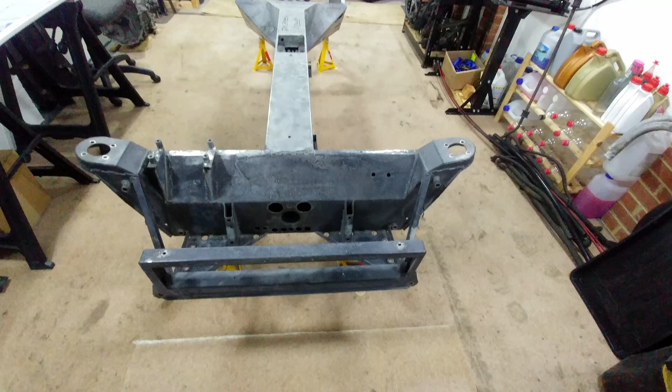Welcome to episode 3. In this video I want to go over the Esprit chassis before I start working on it. As you can see, it's been completely stripped down and cleaned up, so what better time to look at it than now. The chassis is what is commonly called a backbone structure. The body of the Esprit literally sits across the central spine like a saddle, hence the name backbone.

It is the last of its kind before Lotus invented the bonded aluminium chassis for the Elise in 1996. But it served Lotus very well, this being the final evolution from the Elan chassis that was introduced way back in the 1960s. It is an exceptional structure and extremely lightweight, coming in at only 72 kilograms.

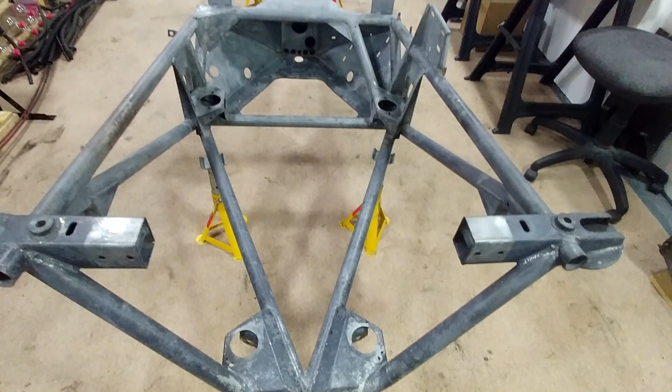Most of the construction material is folded sheet steel, commonly 16 gauge. The tubes are 1.5 inches in diameter and about 14 gauge in thickness. After welding the chassis at the factory, everything was then hot dip galvanised to protect it against corrosion, and as you can see, it has done exceedingly well.

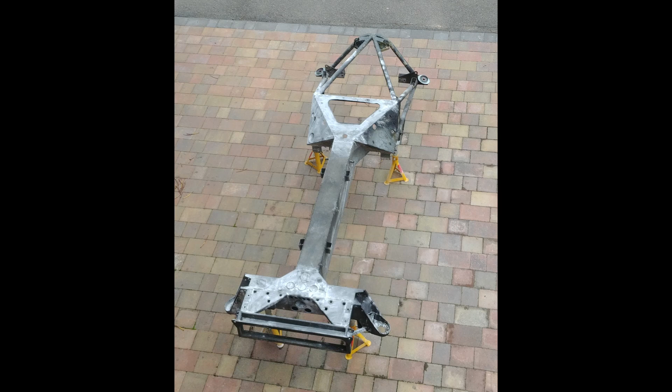When the chassis was stripped, the first thing I did was to get it cleaned and scrubbed. I had planned to use a dry ice blaster to remove the dirt, but in the end it was quicker to do it by hand. I did this using a pressure washer and a strong degreaser, and then good old fashioned elbow grease with a lot of help from my dad.

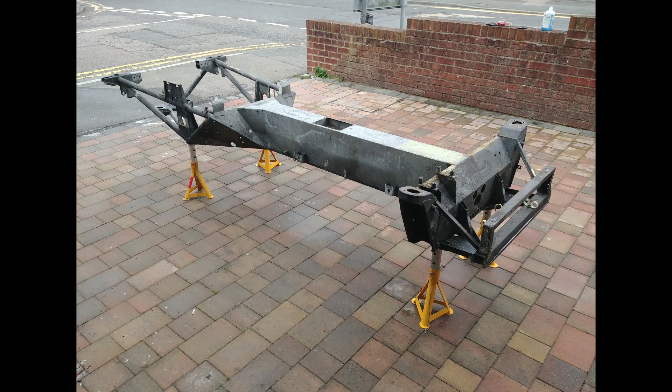What better way to enjoy a November day than to be outside in the freezing cold scrubbing an old piece of metal? Yes, we got a lot of funny looks, but also a lot of people were very interested in what we were doing as well. After washing, a mild nylon abrasive was used to remove the stubborn dirt, and what I can only suggest is zinc oxide from the decaying galvanisation.

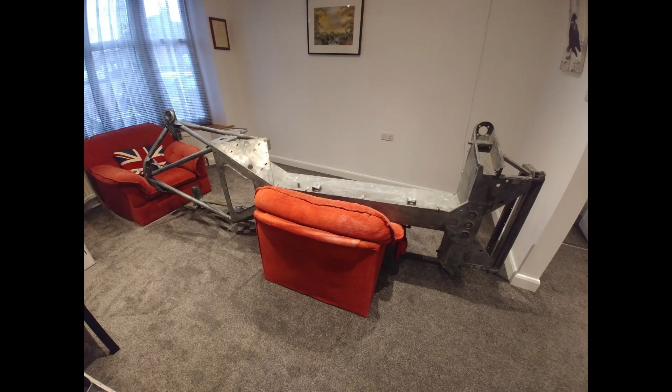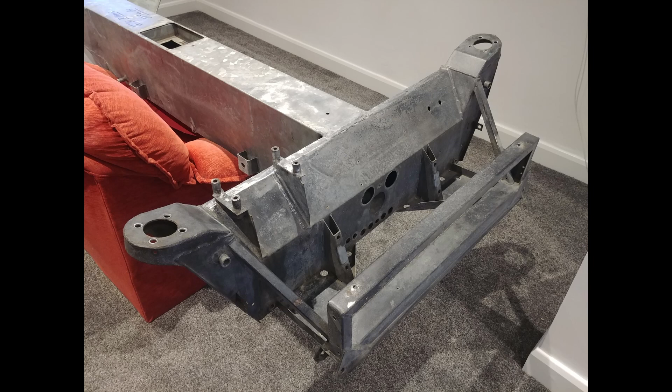After getting wet, I had to store it somewhere whilst it was drying, and I thought, well, what better place than my living room? So here it lived for about a month whilst I checked it over. The good news is the chassis is perfectly straight and well within Lotus's tolerances. Amazing for a car that is over 30 years old and has over 100,000 miles under its belt. Hats off to the Lotus engineers, yet again they did a superb job.

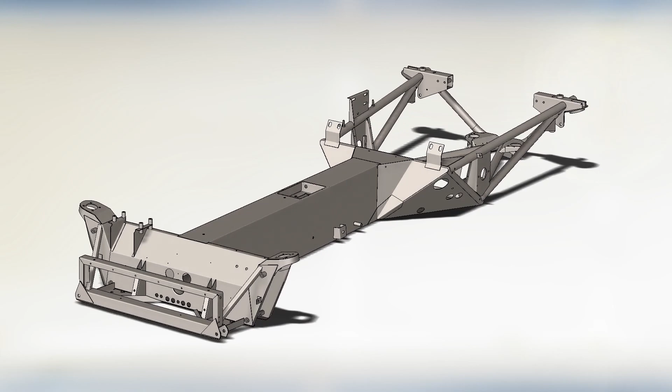Being a structures guy, whilst indoors I studied the chassis and drew the whole thing up in CAD using 3D scans, digital measuring and good old fashioned wire triangulation methods. Here is the result. This is really going to help me in designing the other components of the project, including the new cooling system, the safety cage and the modifications to the braking and suspension when they are added. It also means I can run simulated stress analysis on the structure, more on that in later episodes.

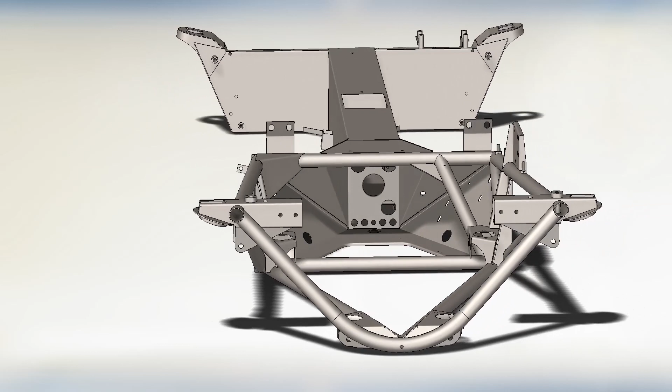Each panel is individually modelled and can be removed. This makes the CAD model an ideal way to explore the construction and gain an insight into what was one of the best chassis of its era, responsible for the Esprit's legendary handling characteristics and developed by a company that dominated Formula 1 for many years.

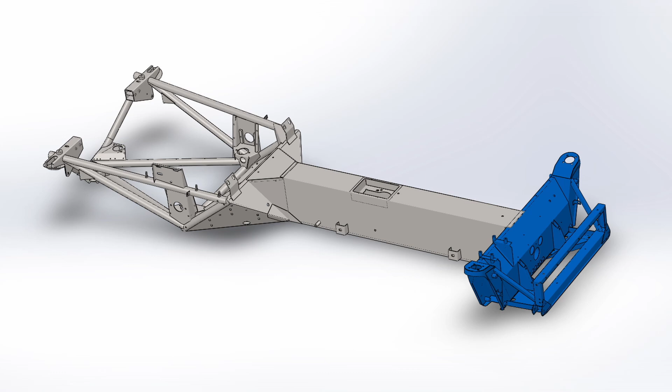The chassis is split up into 3 areas: the front crossmember, front suspension and supporting structure; the backbone, also known as the tunnel or the spine, and its interface panels; and the tubular steel section at the rear, which contains the engine bay and manages the rear suspension.

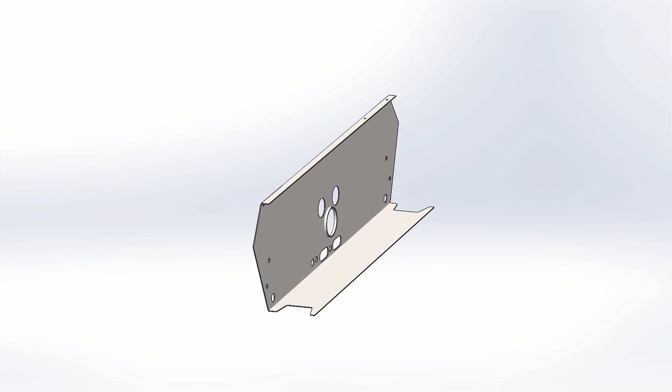The main front crossmember box section is made up of 2 folded pieces of 16 gauge steel capped by thicker suspension uprights. The upper suspension damping mounts are welded into place and steel tubes locate the upper and lower wishbones on both sides.

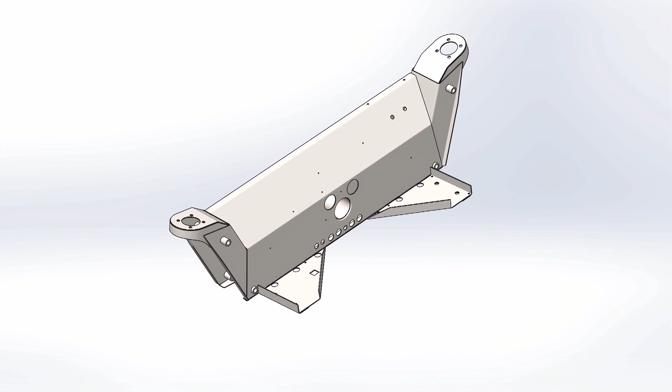2 forward support plates are welded into place and site the lower wishbone crossmember, which is triangulated back to the main crossbeam by these square tubular sections. In later models of the chassis, these are bolt-on removable items.

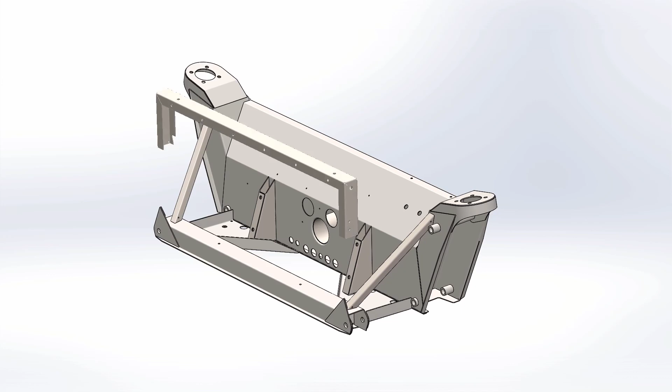The steering rack mounts, in true Lotus fashion, act not only to support the rack but to further reinforce the front section. The front frame provides anchoring points for the radiator housing and also the front of the body shell. And finally, the pedal box mounts are situated in place.

The backbone is primarily made up of a large single piece of folded sheet steel. It is formed into a large U section and it has a cutout in the top to allow the gear lever mechanism to be fitted.

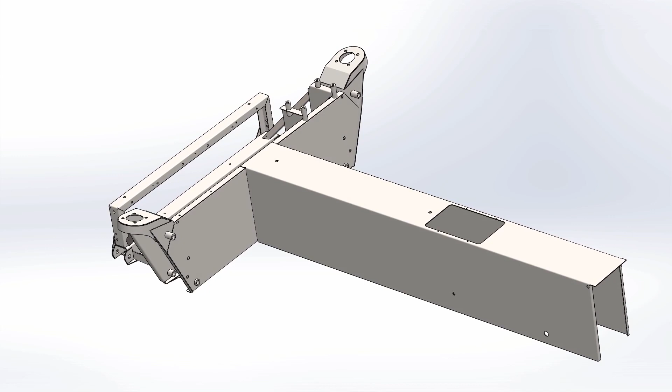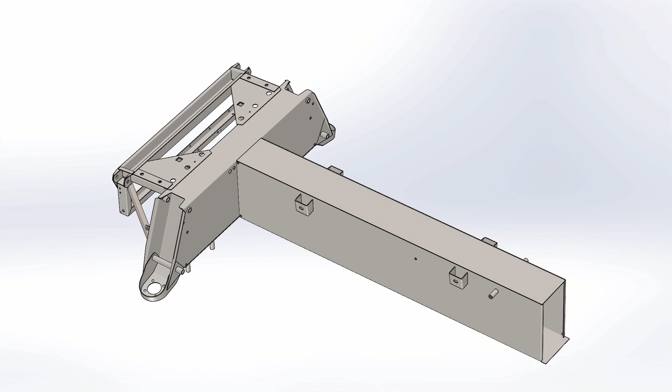Inside the tunnel, the gear lever mechanism plate is welded into place, along with the seatbelt anchor point and 4 body mountings. The open section underneath is capped off by the second piece of folded sheet steel as shown. Finally, at the front, a reinforcing plate is welded at the joint to the front main cross member for added strength.

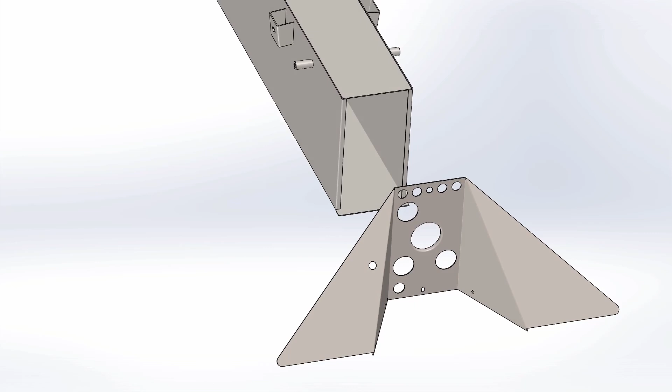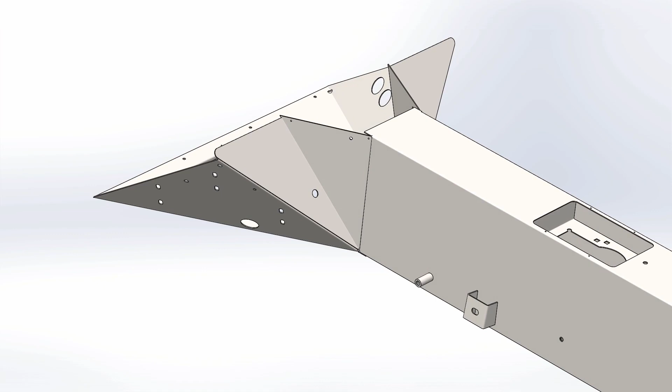At the rear, a complex folded sheet steel arrangement joins the backbone to the tubular steel section. It is completed by this second larger part welded into place. To further strengthen this section, two complex folded reinforcing plates are added on either side. Finally, this section is capped at the top with this plate, and two chassis to firewall mounts are added.

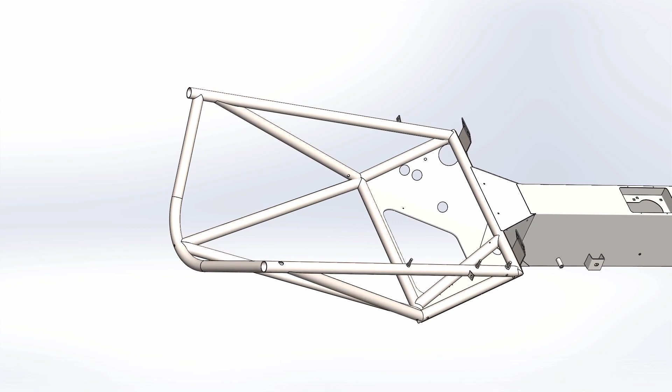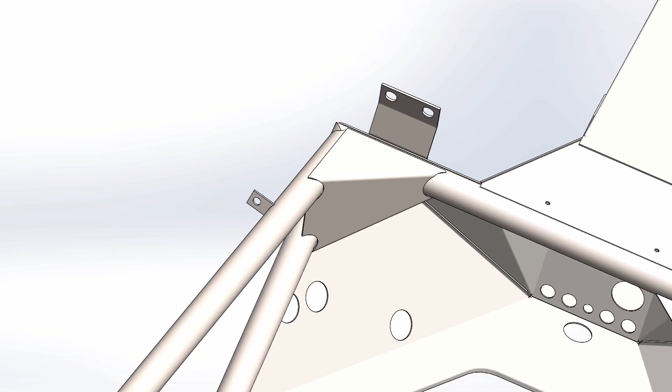The rear structure is dominated by a welded tubular construction. It has a distinctive hoop at the rear to allow the transmission to extend out of the back slightly. The bracing at the front of the bay is asymmetric to allow the engine with its offset cylinder head to fit in. The left-hand side corner is reinforced with this section. The two rear suspension trailing arms are attached to the chassis by these plates, which serve to further strengthen the tubular section.

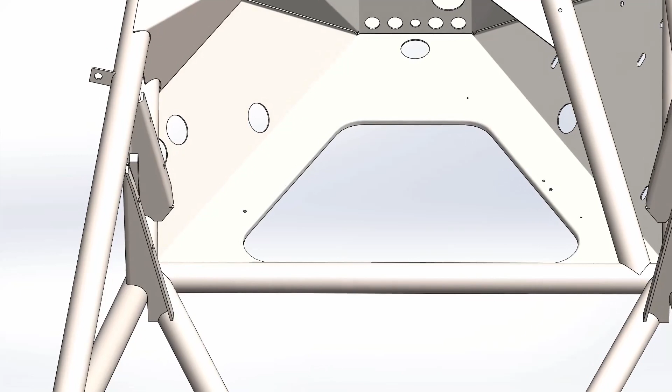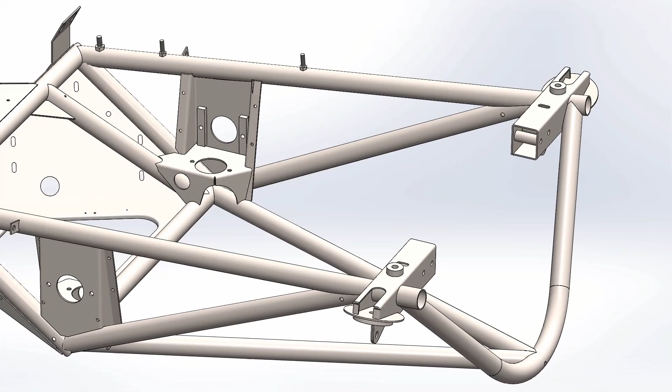At the point where everything meets, there are two engine mounting platforms, one on the left and one on the right. The rear suspension damper mounts also serve to situate the rear suspension upper control arm, the body mounts, and the location for the removable rear cross member. The rear suspension upper control arm is further supported by these two brackets.

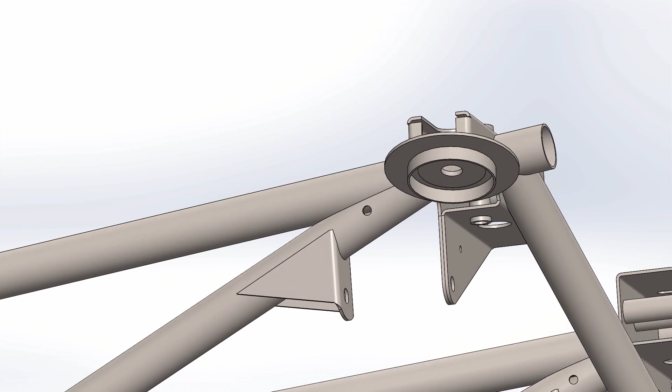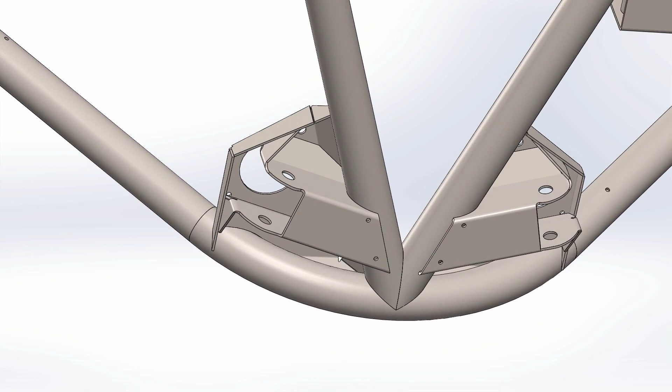The gearbox mounting platforms are located here and serve to brace this common point in the tubular structure. Underneath are the two rear suspension lower control arm mounts. This single side plate is where the ignition coils are mounted. And finally, here is the removable rear cross member, which can be taken off to allow the engine to be removed with the transmission.

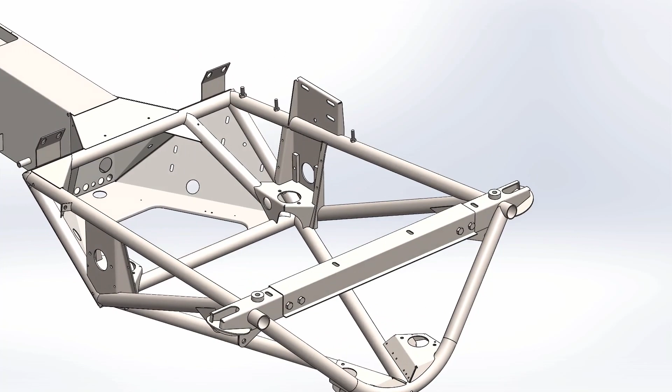Eventually, I plan on doing a complete CAD model for the car, including the engine. Anyways, back to the real world. Before I wrap this episode up, I thought I would share some points of interest with the chassis that I discovered during my documentation.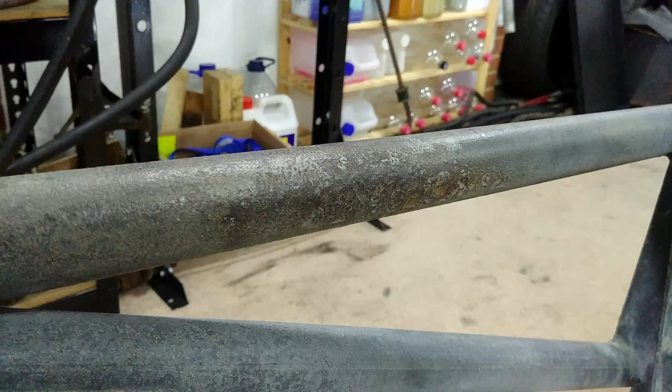Rust around the turbo area. This is common on all 4-cylinder turbo Esprits. It is down to the extreme heat caused by the turbo damaging the galvanisation. This one isn't so bad. I've seen a lot worse where the tubular section has rusted through and needs to be patched in this area.

Upside down welding. I love the little quirks on these hand-built cars. It's possibly why they are so endearing. Here, one of the body mounts is on upside down. Definitely a Friday afternoon job. I may fix it or may just make a special washer for it to counter the draft angle, but it's nothing serious.

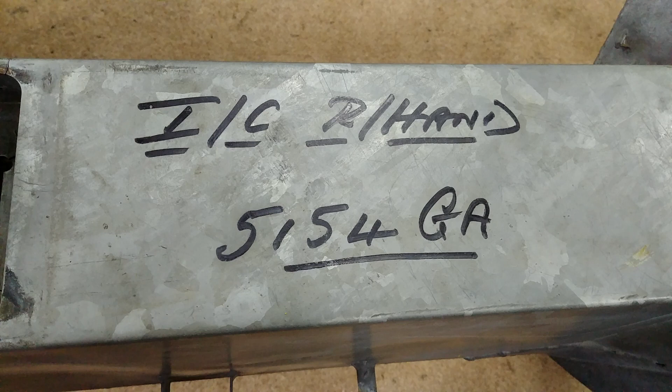On top of the chassis is a handwritten note from 1989 where the line operator has marked the car's identity. IC stands for intercooler. R-hand obviously means right-hand drive, and 5154 is the identity for this specific vehicle. I don't know what GA means, perhaps it's someone's initials. I'm going to try and preserve this, and who knows, maybe one day I'll even add my little note to the car.

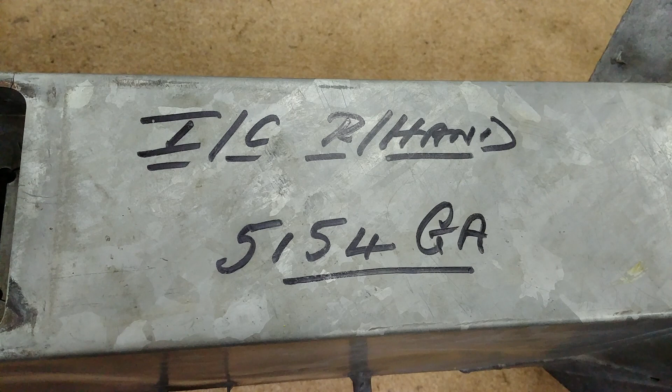Vehicle data plate. Usually hidden by loads of dirt, but in case you were curious, the data plate on the chassis is here. Note the little tiny Lotus logo.

So that is the chassis and the last of the introductions, apart from the body, which will come along at a later date. At last I can start work in earnest, so stay tuned for the next exciting episode.